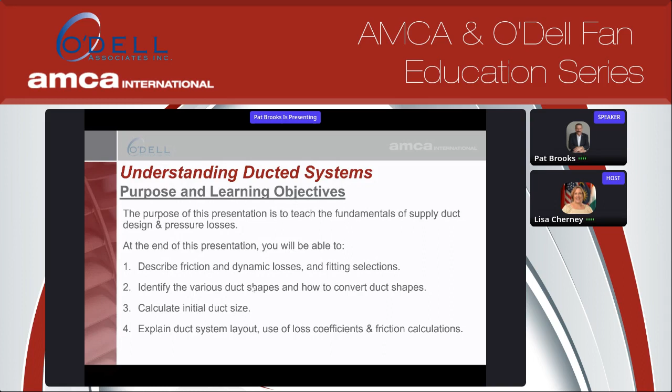The purpose of this presentation is to teach the fundamentals of supply duct design and pressure losses. So we're not going to go into great detail, but at the end of the presentation, you should be able to describe friction and dynamic losses as well as fitting selections, identify the various duct shapes, and you're probably already aware of at least two of them, calculate the initial size, and then we'll explain the system layout, use of loss coefficients and friction calculations, and talk a little bit about equal friction versus static regain and what is total pressure design. So we're going to really start out with the fundamentals.

First, a lot of this information is in this ASHRAE Duct Systems Design Guide. It's recently published. Herman Behls was the main author. Unfortunately, Herman passed away a couple of years ago, but it's quite comprehensive on duct systems. It covers supply, exhaust, and also teaches acoustics.

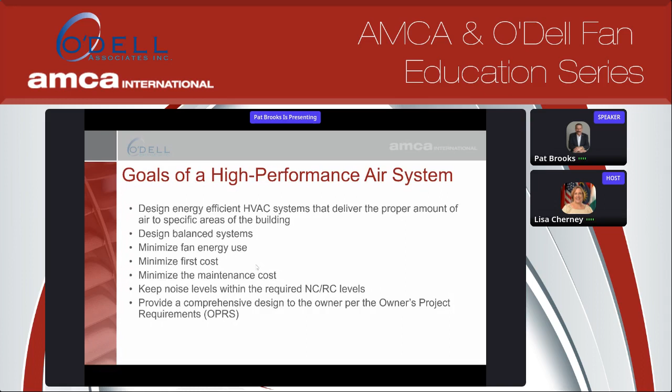All right, so we want a high performance air system. So what are the goals to get there? Well, we need to design energy efficient HVAC systems that deliver the proper amount of air. We want to design balanced systems that minimize fan energy use and minimize first cost. And we want to minimize the maintenance costs. We also want to keep noise levels within the required NC/RC levels. That's another seminar, so we'll talk about it a little bit, but not in great detail. And we want to provide a comprehensive design to the owner per the owner's project requirements. So we want the customer to be happy.

Very fundamental is cross-sectional areas. Round duct is pi d squared over 4. Rectangular is W times H. You're probably pretty familiar with those. And then the one that has become more common is flat oval. That area is equal, as shown there, to pi a squared over 4 plus a times (A minus a), where the A's are little or large according to the figure. Now what this is, you've got two half circles on either side. Put those together, that's the pi a squared over 4. And then you have this box in the middle, which is the flat span times the height. And the flat span is the big A minus the little a.

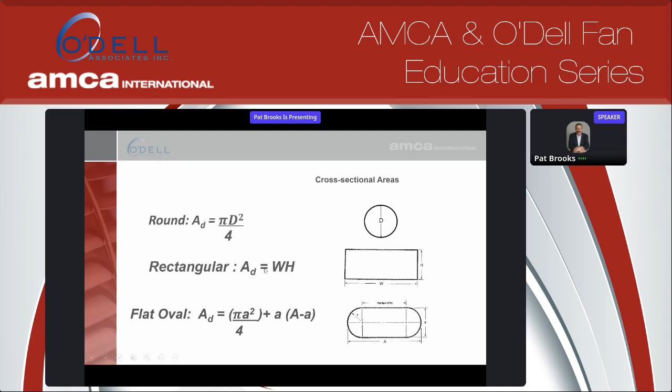Staying with basic equations, the velocity is equal to the flow rate divided by the area, or the area is equal to the flow rate divided by the velocity, or the flow rate is equal to the velocity times the area. I didn't write that last one down, but you can see how those are derived. So a quick example, and these examples are in English and SI units. I'm not going to talk too much about the SI units, but they're there.

So the question is, if the volume flow rate in a 22-inch duct is 5,000 CFM, what's the average velocity of air in the duct? So D equals 22. We're going to convert that to feet. So we get the area in square feet, and that's equal to pi times 1.83 squared, divided by 4. That gives an area of 2.64. So we take the flow rate, 5,000, divide by the area, and we get the velocity of 1,894 feet per minute. So pretty straightforward. Most of you are going to know that.

Example 2, if the design volume is 13,000 CFM and the velocity is 4,000 feet per minute, what's the H dimension of a rectangular duct if the W dimension is 14? Well, the area is equal to Q over V, so 13,000 divided by 4,000 is 3.25 square feet. We're going to multiply that times 144 to get it in square inches, so 468 square inches. And then we solve for the H in the equation A equals W times H, so H equals A over W, and that's 468 over 14, or 33.4 inches.

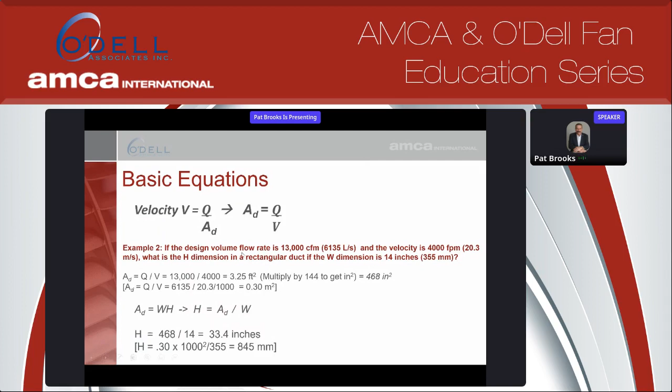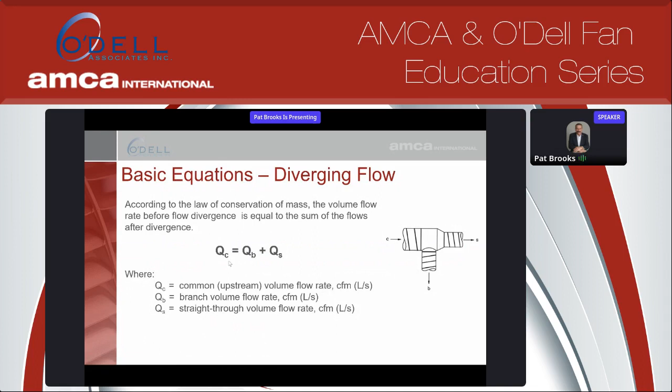Some more basic equations, a conservation of mass. This assumes air is not compressible. But the volume flow rate before flow divergence is equal to the sum of the flows after divergence, or Q_C is equal to Q_B plus Q_S.

Now, still some basic equations, but some important ones. The total pressure is defined by P sub T. It's equal to the static plus the velocity pressure at any point in a duct system. So you can see if you put a pitot-static tube in the air, what's impinging on the front is the total pressure. What's around the sides is the static pressure. And the difference between the two, as shown by the manometer, is the velocity pressure.

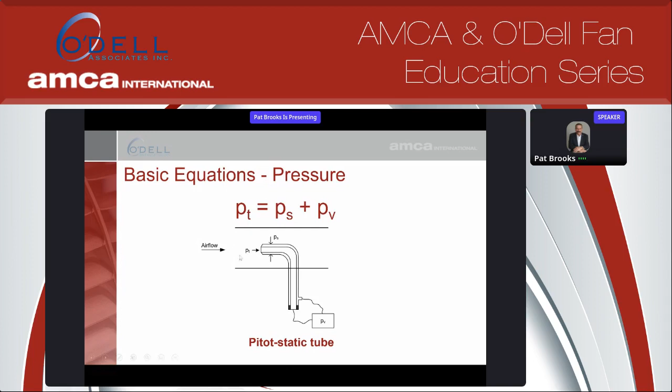Total pressure represents the total energy of the air flowing in a duct system. We like to use total pressure as much as we can in the analysis. Energy cannot be created or increased except by adding work or heat, typically at the fan. Energy, and thus total pressure, must always decrease once the air leaves the fan.

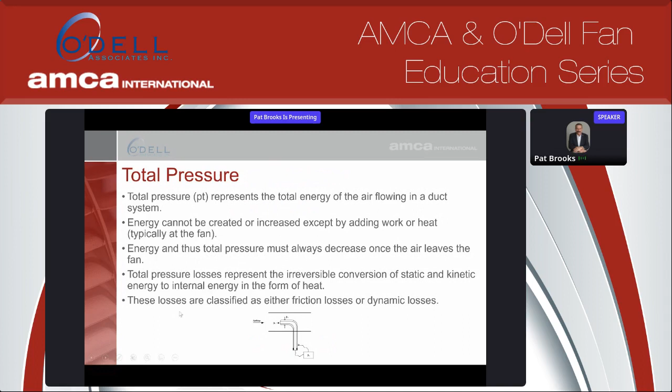Total pressure losses represent the irreversible conversion of static and kinetic energy to internal energy in the form of heat. The losses typically are classified as friction or dynamic. We'll talk more about those.

Now, static pressure is a measure of the static energy of air flowing. Air which fills a balloon is a good example of static pressure. It's equally exerted in all directions. As a bit of trivia, the static pressure at sea level is 14.696 psi. 1 psi is about 27.7 inches of water, and that means 1 atmosphere is about 407 inches of water.

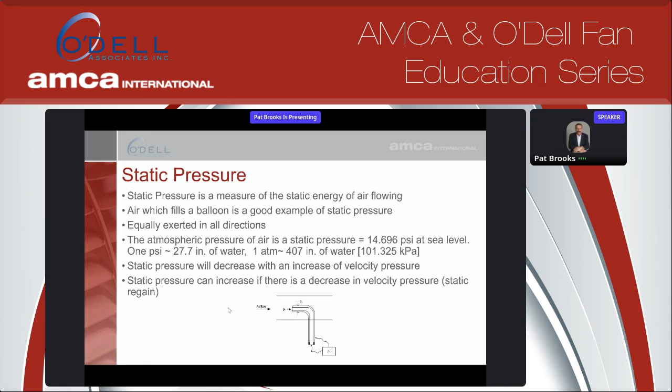It's important to understand static pressure will decrease when there's an increase of velocity pressure, so some of that static is being converted to velocity. Static pressure can increase if there is a decrease in velocity pressure, as some of that velocity pressure is converted to static.

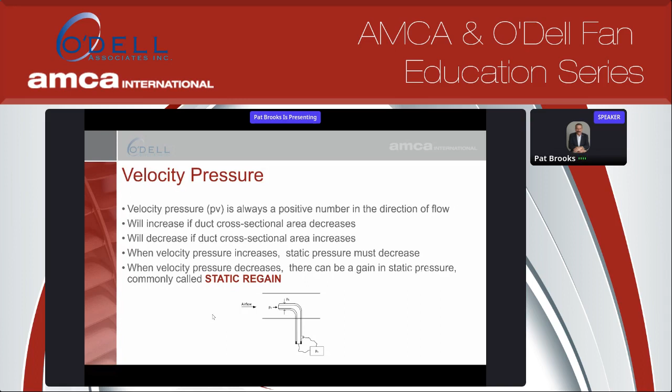The velocity pressure is always a positive number in the direction of flow. It's a vector quantity. It will increase if the cross-sectional area decreases, and it will decrease if the cross-sectional area increases. When velocity pressure increases, static pressure must decrease. But when velocity pressure decreases, there can be a gain in static pressure, commonly called static regain. But if the losses are too great, you may not get that regain.

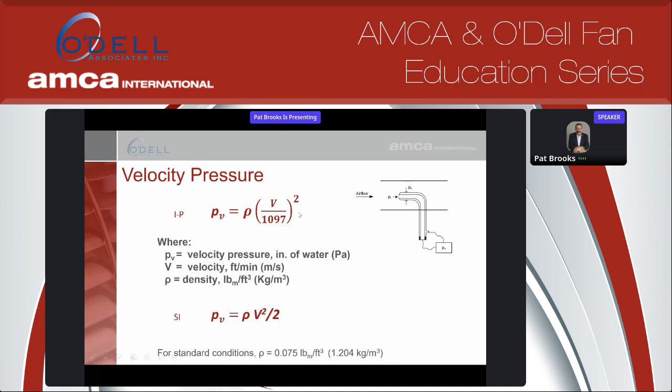The velocity pressure has a couple of equations. The main one is PV equals rho times the quantity V over 1097, squared. The PV is in inches of water, velocity is in feet per minute, and rho is the density. There's an equation for SI as well. For standard conditions, rho is 0.075, or 1.204 kilograms per cubic meter. When you do that, this top equation becomes V over 4005 squared. You want to write that down.

Let's talk about changes in pressure. I'm going from one point in a duct system to a second point, so there's a little triangle in front of P. That's the Greek letter delta, and as far as this goes, that means change. So the change in total pressure has to equal the change in static pressure plus the change in velocity pressure. That's derived from the Bernoulli equation.

Typically we ignore elevation, it doesn't have much of an effect. But if we look at this equation, we have basically the static pressure plus velocity pressure at point 1 equal to the static pressure plus velocity pressure at point 2 plus the losses. So that's how delta PT is equal to delta PS plus delta PV.

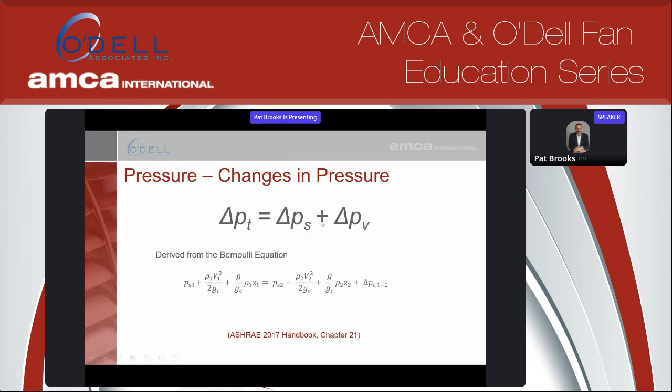Now let's look at a typical design leg. We'll talk about what that is later. But the pressure drop is a gradient along the duct system. So we start out at 0 outside, and it starts to accelerate, and we start to lose total pressure, and it always has to decrease until it gets to the fan.

Then it will increase, and then it will decrease again. So this top line is the total pressure, and note it's not 0 at the exit, not 0 till a little bit away from the exit. We'll talk about what that means.

Static pressure, however, can decrease or it can increase when you have a decrease in velocity pressure. So here's where the velocity pressure decreases on that fitting, that transition. The static pressure is actually increasing. And again, at the fan, it increases and then it decreases again.

And depending on what the velocity is doing, increase or decrease, you get to the outlet and you see at the outlet the static pressure is 0, but the total pressure isn't 0 until you come out a little bit further. That difference is the velocity pressure. So you still have some total pressure as your exit in terms of velocity pressure. The difference in these two graphs at any point in time is the velocity.

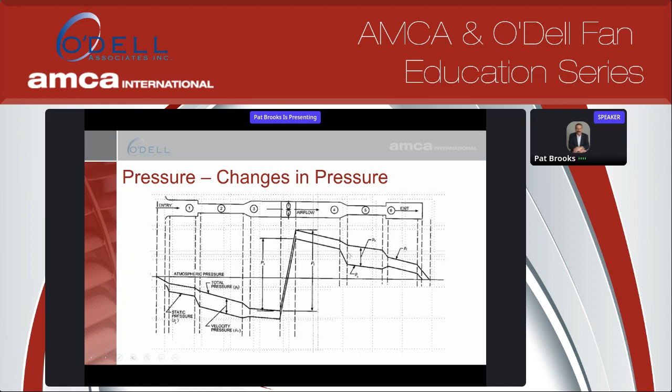So you can see it at this level, then it increases because the duct decreases. And you go through the system like that, where the duct increases, the velocity pressure decreases.

So what causes these losses? Friction losses, which are caused by air molecules interacting with each other and with the duct wall, and dynamic losses, which are mostly associated with fittings, where you might have a change in size or flow rate or construction.

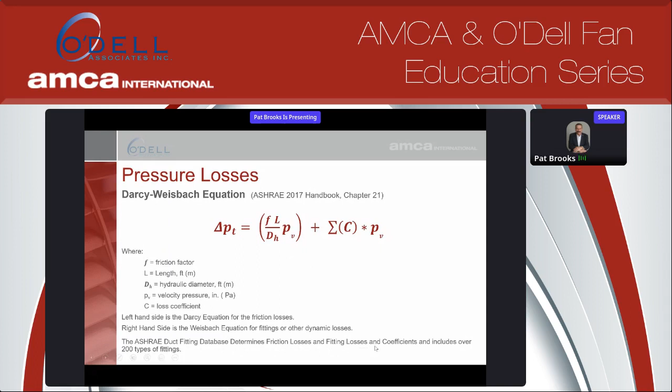The Darcy-Weisbach equation was developed to account for the losses. The left-hand side of the equation is the Darcy, and that's the friction loss. The right-hand side is the fittings, identified by a loss coefficient times the velocity pressure. These coefficients, what we're going to use is the ASHRAE duct fitting database, and it can be used to determine the friction loss and fitting losses and coefficients. It includes over 200 types of fittings.

Now, in that prior equation, one of the factors is the friction factor. So we have to determine that. And we can use the Colebrook equation.

I'm not going to read out the Colebrook equation, but you can see that it's a function of the square root of f on both sides. So it's impossible to solve mathematically. You have to solve it iteratively, plugging in an f and seeing if you get the same result on both sides. Eventually, doing that iteratively, you can determine the friction factor.

But note, it's also a function of what looks like a scribbled E. That's the Greek letter epsilon, and that is the roughness of the material. DH is the hydraulic diameter, and RE is the Reynolds number.

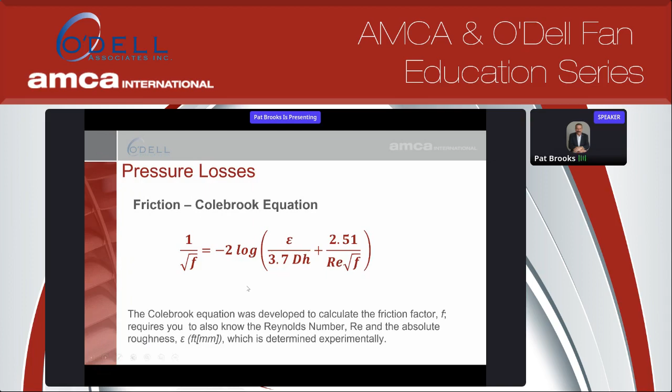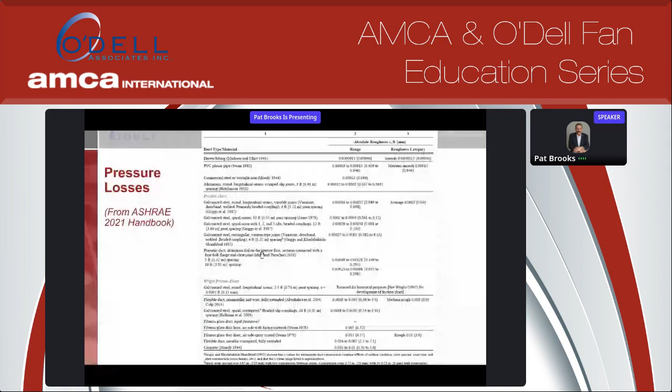Now, the roughness values are determined experimentally, and you can see in this chart, I'll blow it up a little bit, it gives you the duct material type and the absolute roughness in feet for English and millimeters for the SI system. What's commonly used is galvanized steel round longitudinal variable joints or galvanized steel spiral seams for round duct, and that's got an average loss of 0.0003. For galvanized duct, it's 0.00027 to 0.0005, commonly used 5.

Just a little clarification - this is based on 4 foot, and most rectangular systems today are 5 foot, but that's okay, you're not going to have that much difference. And I would use 0.0005.

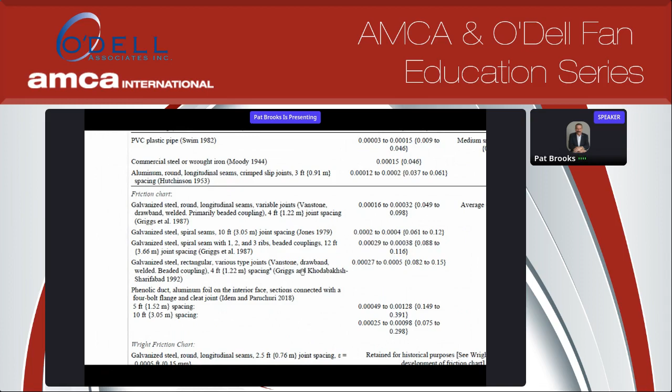The right-hand side is the Weisbach equation, as we said, and that's the sum of the loss coefficients times the section's velocity pressure. So if I have 3 or 4 fittings, I can get the coefficients for each of those in the section, multiply that times the section velocity pressure, and that's going to be the total pressure loss of the fittings for that section.

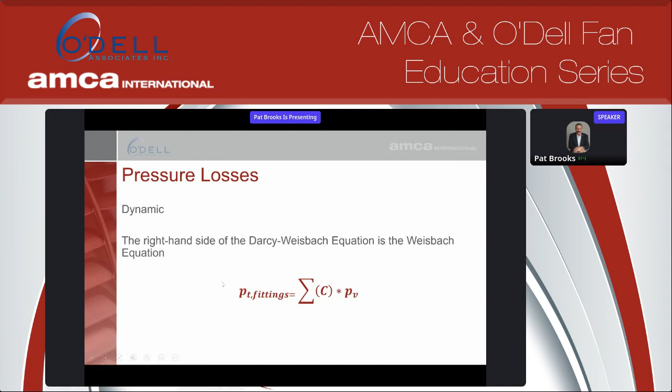Where do they come from? This is an example - they come from experimental data. This is for a single flow fitting, but the ideas work for branch fittings or diverging flow fittings as well. You measure the static pressure at plane 7, upstream of the test fitting, and again at plane 8, some diameters downstream. You subtract off the friction loss as well as the change in velocity.

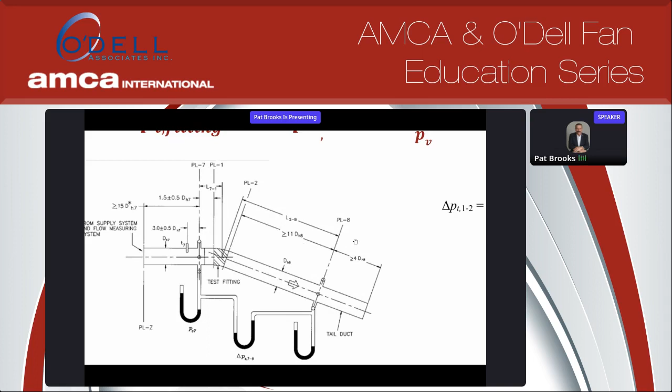Now, for a single flow fitting, the change in velocity is zero. But basically, that's the equation used to determine the total pressure loss of the fitting. That's typically called the zero length dynamic loss because it's based on no friction. The friction is always calculated to the center line of the duct.

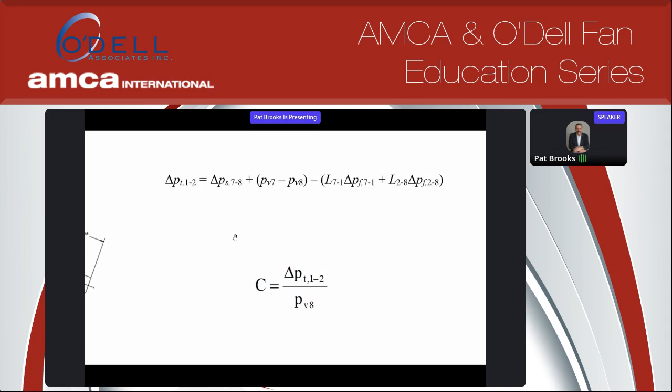Then if you get single flow values, you can actually do a regression of the total pressure loss to the velocity pressure, and that'll give you the loss coefficient. But if you're using branched fittings, then you're probably going to tabularize them based on the volume flow rates.

So I talked about the ASHRAE duct fitting database, and it's interesting - about 27% of the attendees do use the database, 63% I think were not aware of it, and 9% did not use it.

But it's a really nice program. You can actually purchase it in conjunction with the duct design guide - they'll give you a discount on it. If you do, make sure you get the spreadsheets. They're free, and they show the examples in the duct design guide as well as a master spreadsheet if you want to use spreadsheets to calculate your losses.

It calculates the loss of round, rectangular, and flat oval duct and fittings - all 3 shapes. It calculates and takes into account density, so you can change the air properties, kind of do it on the fly if you want, but it won't convert. Once you convert from IP to SI, you'll have to re-enter the values for the SI.

The typical values that you need for density are humidity, elevation, and temperature. It determines the pressure loss based on input dimensions and flow rates. You can look up a complete fitting loss coefficient table, and you can print it or export it to Excel.

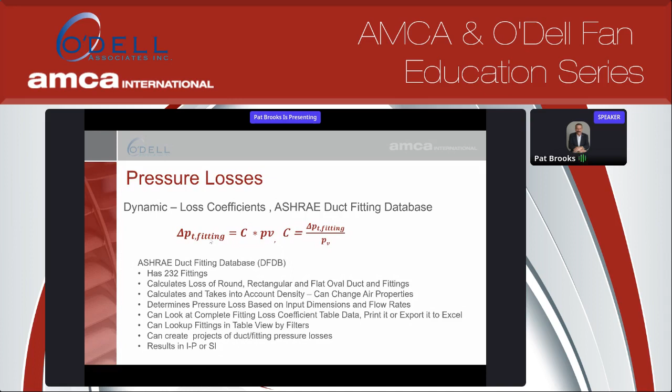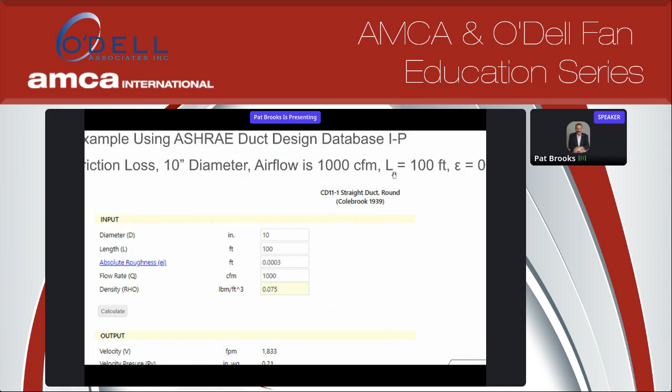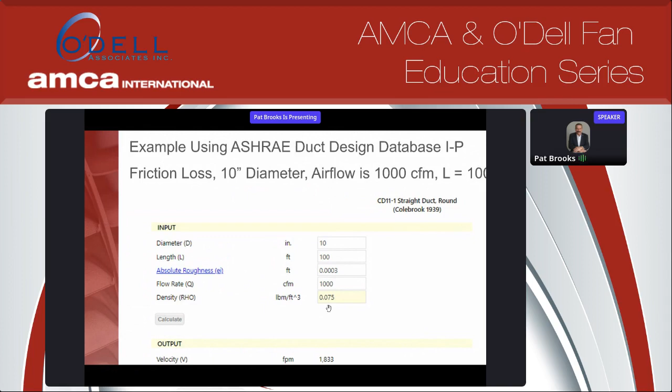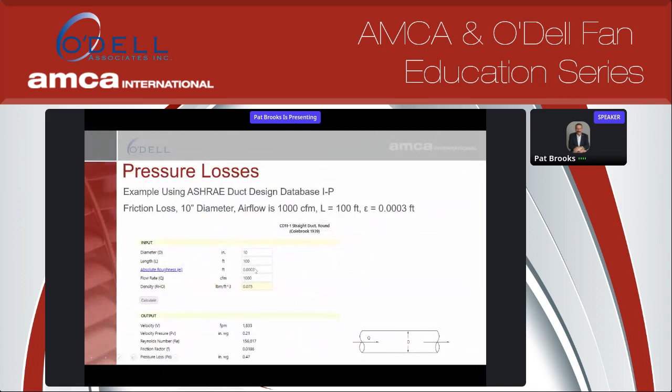Here's an example for calculating the friction loss at 1,000 cfm. Length is 100, the roughness is 0.0003. We input that data, and it calculates the density based on prior inputs, and gives the output: the velocity pressure, and most importantly, the pressure loss. You can say the same thing with the metric.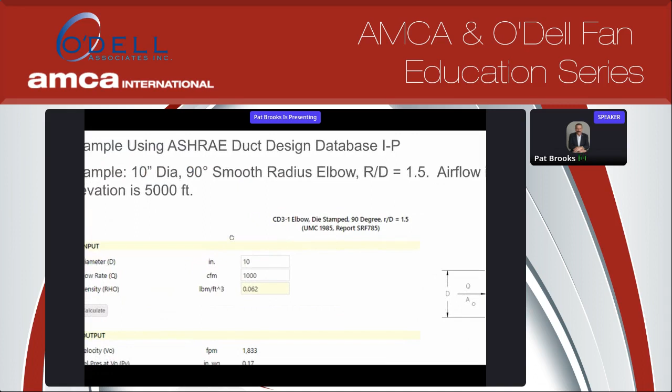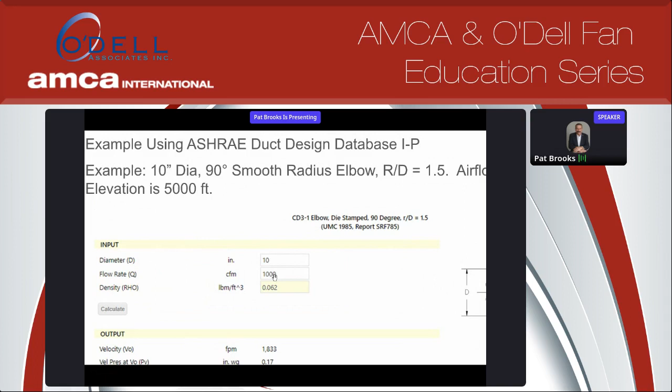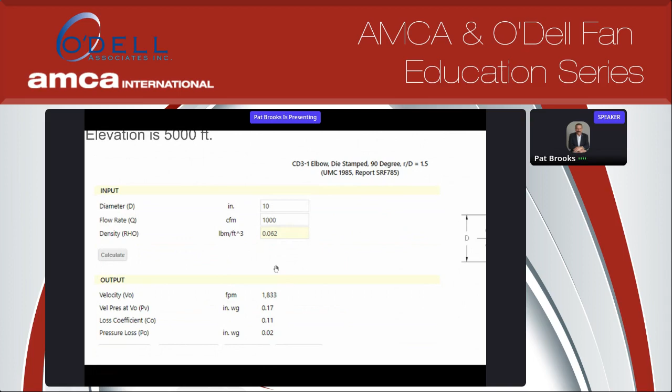Now, if I have an elbow, for example this is a CD 3-1 die stamped elbow with R over D equal 1.5. I pull that fitting up. I put in, in this case, 10 inch, but I have an elevation of 5,000 feet, so I put that in prior, and that gives me a density of 0.062. So I need the volume flow rate, and I come up with the velocity pressure, the loss coefficient, and the pressure loss. So this particular case is a very low pressure loss. And there's the metric version of that too.

Now it's important to point out what friction is a function of. So if we did a comparison with 4 different velocities from 1,000 to 4,000, and 2 different roughness values: the standard galvanized for rectangular is 0.0005, lined duct rectangular is 0.003, so that's a factor of 6 difference. An example using a 24 by 32 rectangular duct.

So if we look at the difference in the roughness, even though it's a factor of 6, there's not very much difference in the friction loss. It only increased by 0.01 at the lowest velocity of 1,000. And even at 4,000, it increases a little bit less than 0.3.

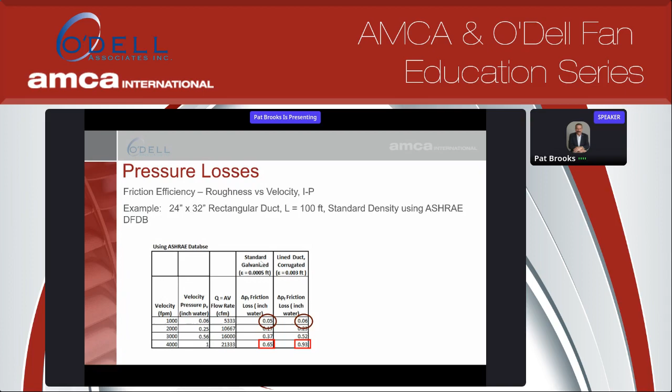But if I look at how it increases from one velocity to 4 times that: at 1,000, I'm at 0.05; at 4,000, I'm at 0.65. Same thing with metric, you can see the differences. But that's a factor of 13 increase in pressure loss when the velocity is increased by a factor of 4. So that's a pretty significant increase just due to velocity.

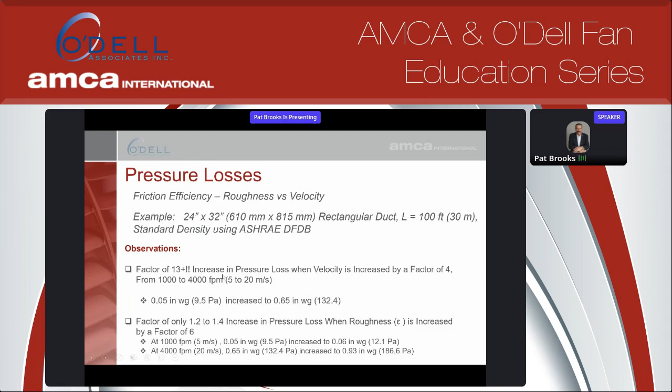But it only increases by a factor of 1.2 to 1.4 when the roughness is increased by a factor of 6. So the roughness doesn't play near as much role as the velocity does. If you can keep your velocity down, you'll keep your friction loss right down.

Here's an example of using it for rectangular. Plug in the numbers, and it's 19.9. In flat oval, here's the area of the flat oval, it's 294, the perimeter is 64. I plug those in and I get a 19-inch equivalent round size. Now, if the round size is known, then knowing one of the rectangular or flat oval dimensions, you can solve for the other one iteratively, or use the charts.

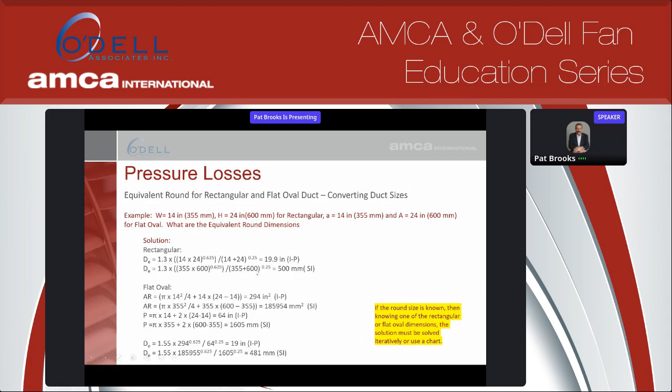I want to talk a little bit more about fitting efficiency. We'll do that with a series of elbows. The first one is a smooth radius elbow with R over D equal 1.5, that's got a loss coefficient of 0.11. For a smooth radius R over D equals 1, the loss coefficient jumps to 0.24.

But look at the lower velocities, to 2 decimal places, the loss is still only 0.01. Now if I jump up to 4,000 feet per minute, it jumps to 0.24, so that's significant. But at 1,000 feet per minute, I can probably get away with using the R over D equal 1 elbow just as well. Then there's the 5-piece, R over D equals 1.5, that's got a fairly low loss coefficient. The 3-gore, 3-piece, is 0.34.

Mitered with vanes, it jumps to 0.48. And the one we don't want you to use without vanes is a mitered elbow without vanes, that's got a loss coefficient of 1.19. But even at that, at the lower velocity pressures, the pressure drops only 0.07. Now if you go up to 4,000, it's well over an inch. That's pretty significant.

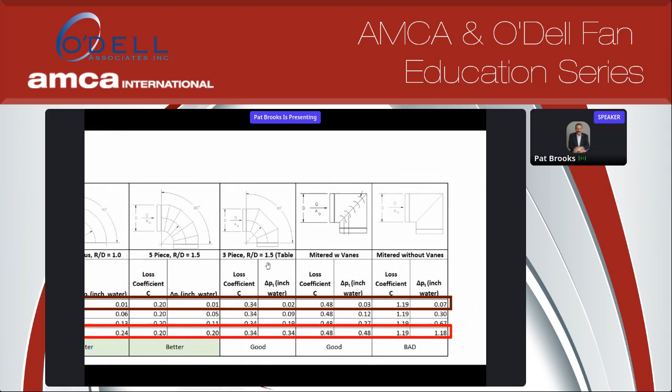Now I want to talk about rectangular elbows. You can use splitter vanes, short radius with splitter vanes. I didn't put those out here, but those can become pretty expensive. And what you might find is without the splitter vanes, the loss isn't that great. You might want to go that direction.

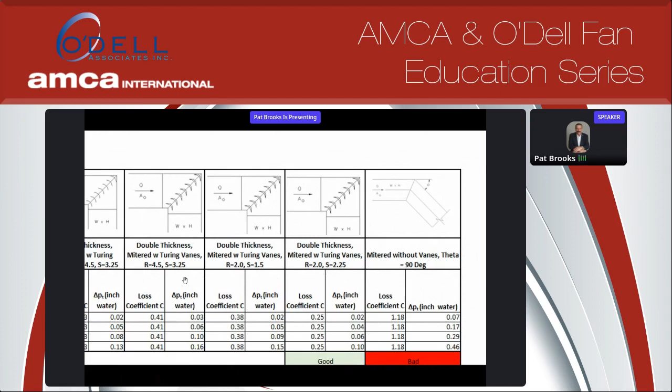This is the metric version.

A couple things we want the audience aware of: vanes with trailing edges have been tested to have higher loss coefficients than standard construction, and a lot of the reason for that is they don't get installed perfectly and they cause more turbulence than they take away. Removing every other vane can more than double the pressure loss. Don't do that. It sounds like it's money saving, but it's really not.

The other important aspect is that turning vanes are typically 90 degrees. If they're used in elbows of other angles, the pressure loss will increase. Or if they're loose, as shown in this figure 5-14, you can see the 90-degree vanes aren't turning the air all the way to 90 degrees, so this is creating a lot of turbulence here.

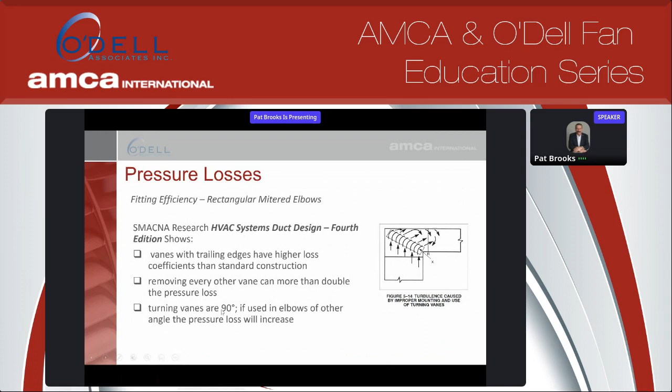What we would recommend is make the outlet of the fitting the same as the inlet and then use a transition. But if you're in a different type of elbow, let's say a 45-degree elbow, you don't want to put 90-degree turning vanes in. Either leave it out or you have to make special vanes.

Branch fittings also have associated loss coefficients, sorry about the voice.

The branch fittings also have associated loss coefficients. You can see a conical Y, 45-degree conical Y is the lowest, 0.15. 45 is still pretty low, 0.38. But a 45-degree entry is a little bit lower than the Y at 0.35. And then you have the conical of 0.44, and then a straight T, which is pretty bad, loss coefficient of 1.21. So it looks like this conical tap, this 45-degree conical, is the best.

But what's missing? Well, if you've got to turn the air 90 degrees, as you do with a 45-degree wye, you have to add an elbow. So you have additional pressure loss for the elbow plus additional cost of making it. So we recommend for 90-degree branches to use the 45-degree entry.

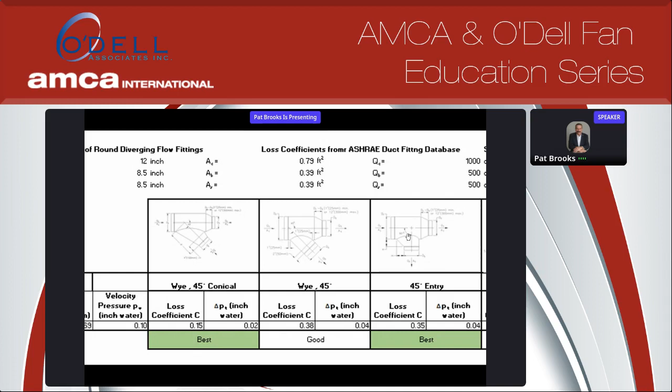Determine the design legs for both supply and return. Determine the required fan operating pressure. Analyze the duct to improve balancing, reduce material costs. Select the fan according to proper guidelines, and if you've attended the other sessions, you know how to do that. Analyze the design to make sure it meets the acoustical requirements. Select materials that minimize costs and meet SMACNA's duct construction standards. Analyze the life cycle cost of the design and commission the design to make sure it meets the owner's project requirements.

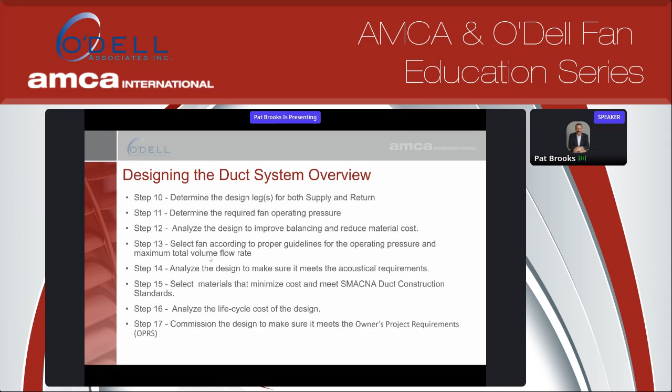So let's talk about the critical path again. The critical path is a section from the fan outlet to a terminal device with the highest total pressure drop for supply systems. Or there's one for return, from the entrance to the fan inlet with the highest total pressure drop for return or exhaust systems.

So at least let's talk about supply. One section, one path will have the highest total pressure. Other paths will have lower pressure requirements. Well, that difference is the excess pressure that the non-design leg has compared with the design leg. What happens if you don't make those equal?

Air redistributes to the path of least resistance, and you won't get the right airflows, so you have to balance the system. How do I balance it? Let's say I have a design path of 1.5 and another one at 1. How do I balance that?

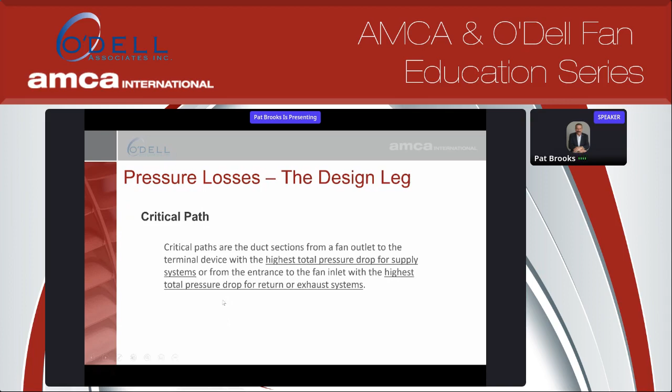I could use a balancing damper to add that 0.5 inches, or I could use a smaller duct size with a higher friction rate, or a less efficient fitting. The last two also save money, so it helps balance the system and lowers the duct system cost. That's where we use a total pressure design to help reduce the sizes.

Selecting the design method, equal friction, just some pros and cons. It's easier to use. You can use a duculator, but it doesn't account for the friction or fitting losses when doing the design, at least not the way static regain does. You still have to calculate them. And the optimum friction rate's not known. Is it 0.08? Is it 1? Is it 0.5? It's not known.

In static regain, you might have larger duct sizes, but they're offset by smaller sizes in non-critical paths. A non-critical path is the same as a non-design leg. Systems will be more balanced, often using smaller sizes or less efficient, lower cost fittings in the non-design legs. But sizing is cumbersome, may require iterations, best suited for a computerized duct design program. It can only be used on supply systems; we haven't developed the static regain method for return systems. And you must choose an initial velocity based on some guidelines.

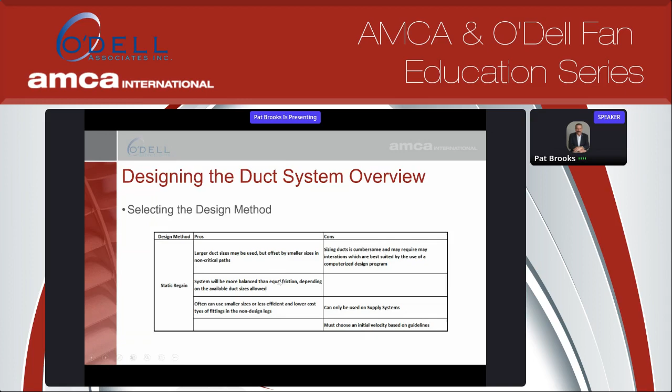So let's look at equal friction design. Size all main and branch ducts at a constant friction rate per 100 feet, including the initial section. Whatever that is, that's one way.

Calculate the total pressure loss for each section, supply and return. Use a spreadsheet if it's helpful. For each main and branch of a junction, be sure to account for the straight through and branch losses. Tabulate the total losses required for each path, then determine which one's the critical one, the one with the highest operating pressure.

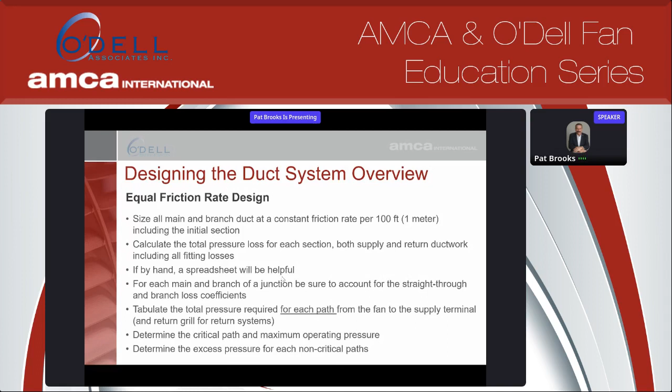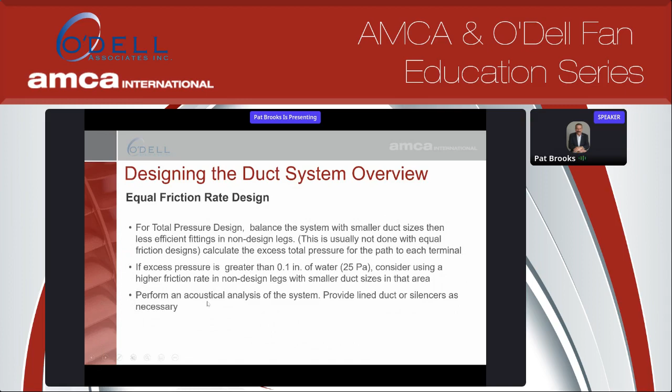Determine the excess pressure for the non-critical paths. If you applied the total pressure design to that, you can look at balancing the non-design legs by using smaller sizes, higher friction rates. Then you should perform an acoustical analysis in the system to make sure it's meeting your requirements. In static regain, you're going to determine the initial design.

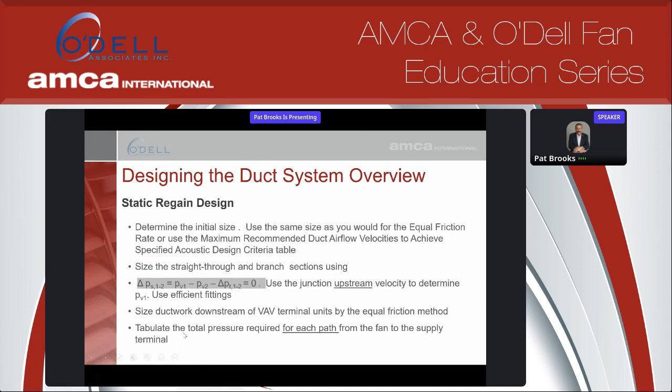Use the junction upstream velocity to determine PV1. Size ductwork downstream of a VAV by the equal friction method. Tabulate the total pressure loss required for each path from the fan to the terminal. Here's the development of the static regain equation.

Basically, what I want to do is make the static pressure at point 1 equal to the static pressure at point 2, or really the static pressure at 2 equal to 1. If you do that and go through the system, it'll be balanced, and you end up with this equation. If you solve this equation and it equals 0, then static regain will have balanced the system. Now let's take a look at that.

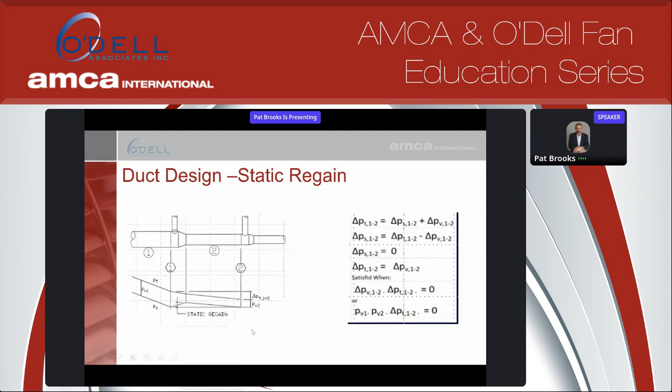It's PV1, which is going to be a given for what I'm working on in the second section, minus PV2 minus delta PT, or the total pressure loss. So the lower the total pressure loss is, the more efficient fittings I use, the higher PV2 can be, which means the sections can be smaller. That's the whole idea behind static regain: a balanced system with smaller sizes.

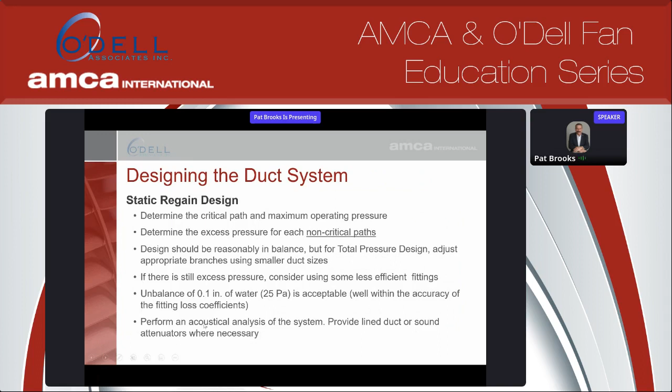For static regain design, determine the critical path, we're continuing on. Determine the excess pressure for each non-critical path. Design should be reasonably balanced, but the total pressure design method will allow even smaller sizes in non-critical paths. If there's still excess pressure, consider using less efficient fittings. If the unbalance is 0.1 inch or less, you're in pretty good shape. Perform an acoustical analysis. So we're going to do a quick example.

You can read this. The temperature is 69, elevation is roughly 5,000, so you end up with a density of 0.061. Diffuser and distribution ductwork downstream of the VAV box has a pressure loss of 0.05, and the VAV box terminal units have loss coefficients according to the following table, which allows us to add those loss coefficients into the respective sections.

ASHRAE has recommended duct airflow velocities to achieve specific acoustical requirements. The first section is typically the maximum velocity. So in this case, with duct location and shaft or drywall sealing, and wanting an NC or RC of 35, my maximum velocity should not exceed 3,500 feet per minute. That's whether you're designing equal friction or static regain. There's also a column for rectangular duct.

Sizing the first section, let's do an example. The total airflow is 11,400 CFM, and we want to size it for a maximum of 3,500. The ASHRAE database has a friction fitting that will do that for us, the CD11-3. We find the initial velocity in the round section is 3,344 feet per minute.

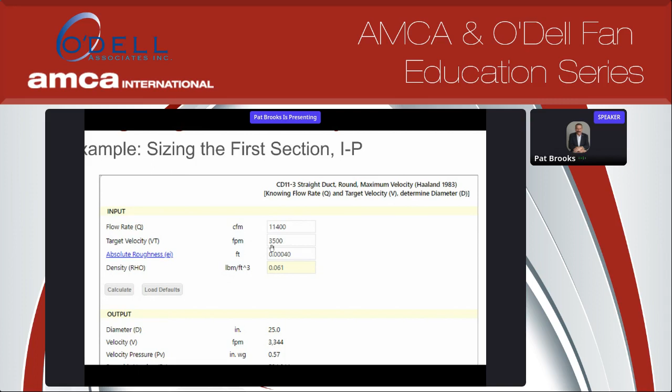Here's that section 11-3. I put in the CFM, the target velocity of 3,500, and the absolute roughness, this time 0.00040. It comes up with a diameter of 25 inches, a velocity of 3,344, gives me the velocity pressure, and the friction loss per 100 feet for doing equal friction design.

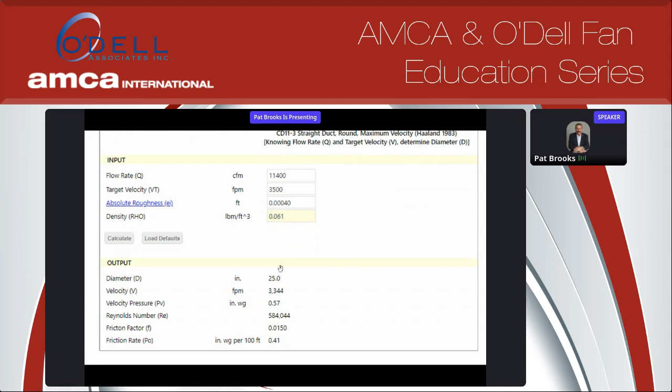You can do the same thing with the metric version.

Now let's go ahead and design the equal friction. It has a friction loss rate of 0.41. That rate is used to size other sections. I can use the duct fitting database CD11-4 to size that. It says CD11-1 to calculate the pressure losses, but CD11-4 already gives you the pressure losses, so you don't really have to use CD11-1.

We also have to account for fitting losses, so a spreadsheet is used to calculate the data. Here's the CD11-4. The target friction rate is 0.41, 7,400 CFM, and that gives me a size rounded off to 21 inches and a total pressure loss of 0.048. The actual friction loss is 0.437 inch per 100 feet.

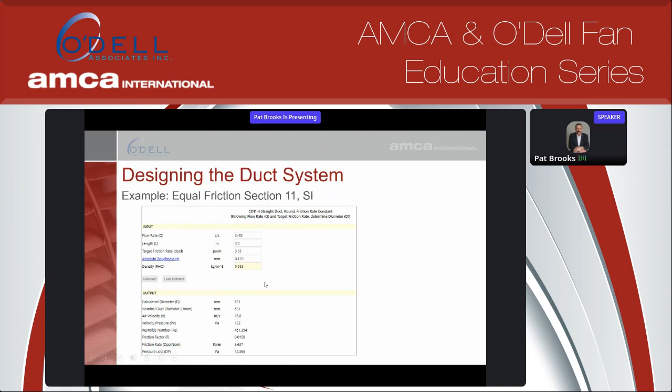The metric version. Here's the spreadsheet.

Now I'm going to look at section 2, which is off the transition of the fan. We already said it's 25. I've got a couple of different types of fittings, an elbow and a branch fitting. I put down their loss coefficients because I can add those up to a total of 0.14. Multiply that times the velocity pressure in the section, and I get 0.08. The friction loss I've already calculated at 0.11. Adding those together gives a loss for section 2 of 0.19.

Going on to section 11 with the 7,400 CFM, the duct size becomes 21 and velocity 3,077. I still have a loss coefficient of 0.14 for the T. Multiply that times the velocity pressure, it's 0.07. Add that to the friction loss, and it's 0.12. I just continue to do that. This is the metric version of it.

So the results are total pressure drops for each of the paths, the excess pressure, which is the highest pressure drop minus the pressure drop required, and a deviation, which is an average percent away. So what's the design like here? Well, the highest pressure drop is 1.3, so it's the path to box 9 and 10.

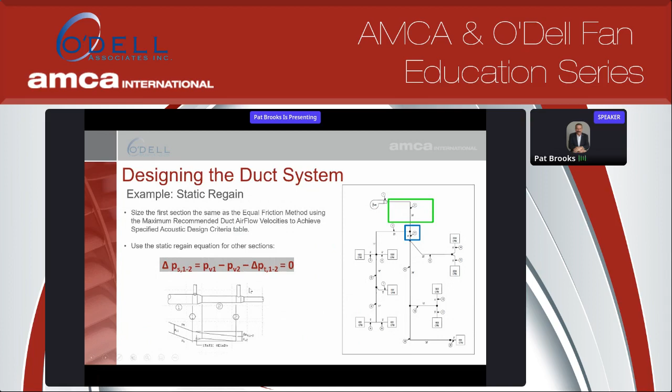Now for the static regain, I'm going to use this equation. Again, the first section is designed the same way with acoustics. But when I'm doing the calculations, you can see here, this is section 2, has the same result as the equal friction because that's the first section. But I added a column, the regain column, which is PV1 minus PV2 minus delta PT. When that's equal to 0, then I've got the correct size.

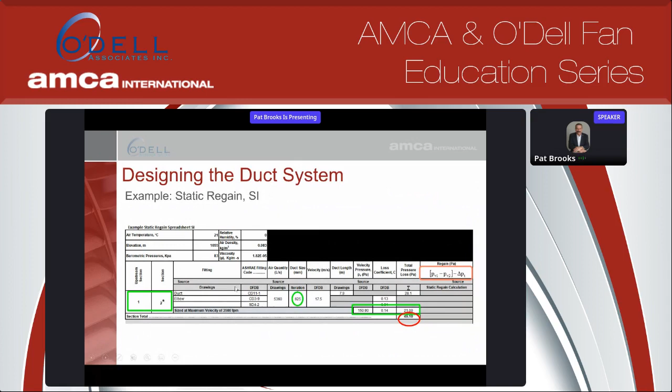There's the metric version for the first section. So this is where the iterations come in. The size upstream is 25, and I start out with that. My pressure drop is too high—it's not shown here, but I have to go to the fourth iteration. So I went from 25 to 24 to 23 to 22-inch diameter. At 22-inch diameter, the regain is 0.07. If I go one more, the regain becomes negative. I don't like negative, so I go back to the 0.07, and the size becomes 22 inches.

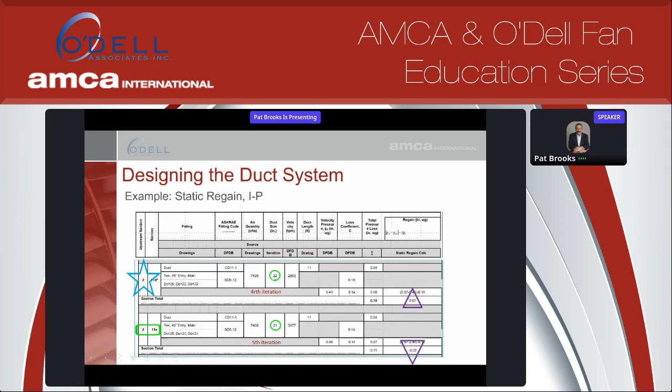Same thing with the metric.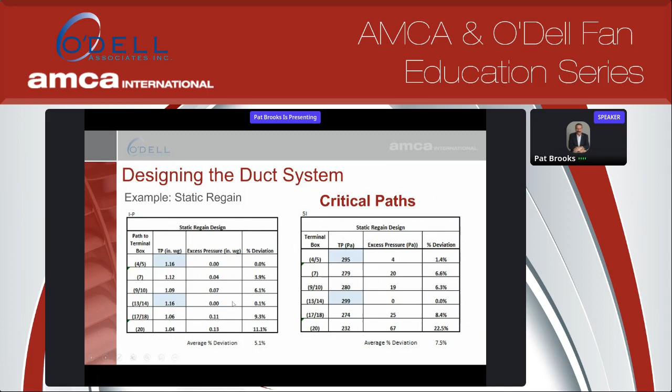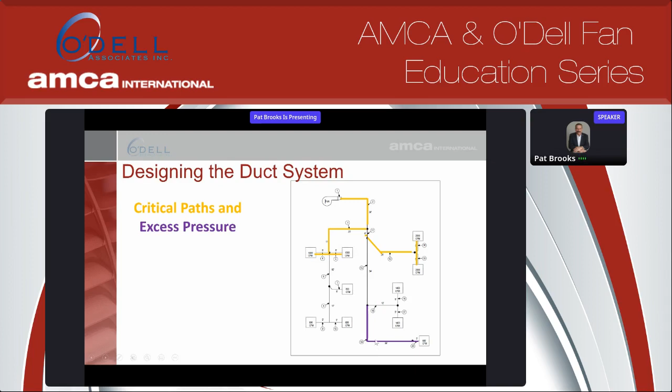So here's my critical paths going into sections 4, 5, and 14. This shows there's excess pressure in section 19. So we'll take a look at that.

So this is comparing the static regain to the equal friction. You can see the equal friction has a higher pressure requirement, and it actually is a little bit worse balanced, but it's pretty close. That's due to the lower velocities in the symmetrical. But the general case is the static regain will give you a better balance.

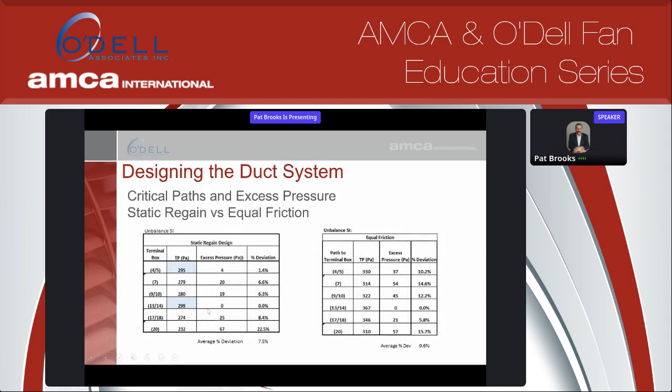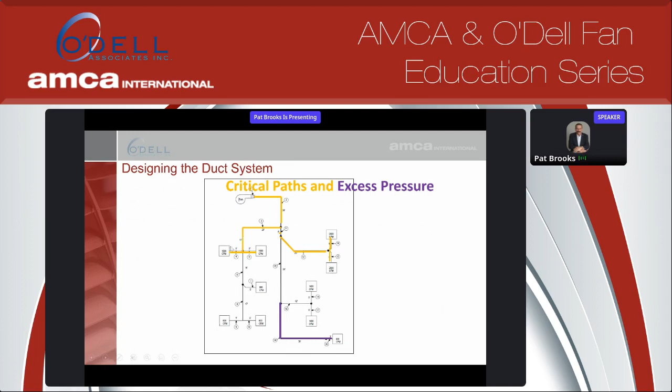So that's the metric version of it. If I want to apply the total pressure method with the static regain, I'll go to that section 19. It's now 9. What if I lowered that to a size of 8, or 229 to 203 millimeters? What happens? Well, that makes this leg very close to the other two legs. We'll take a look at that.

Static regain versus the total pressure. Now, the operating pressure didn't change, still 1.16, but the excess pressure went from an average of 5.1 down to an average of 3.8. And in particular, section 19 was reduced by an inch. So that in itself is saving money.

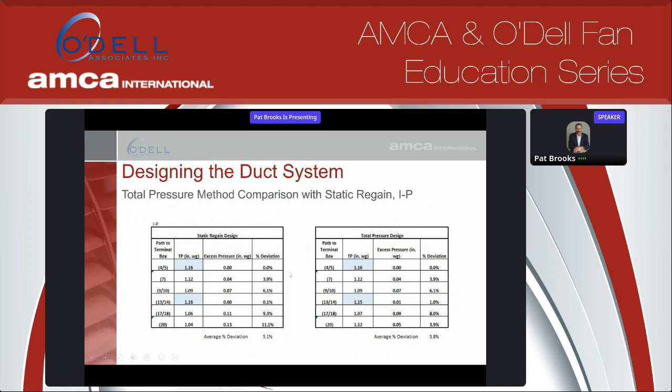And there's the metric version of it. So in conclusion, equal friction designs may not be well balanced. Now, it could be if you're using very low velocities and it's fairly symmetrical. It could be pretty well balanced straight out of the gate.

Static regain design should be better balanced, and for the same first section should have a lower operating cost. First sections can be sized to meet acoustical objectives. Efficient fitting should be used in the initial design. We saw that with the static regain, that the more efficient the fittings, the higher the velocity pressure can be, which means smaller duct. Smaller duct sizes or less efficient fittings can be used after the initial design to help balance.

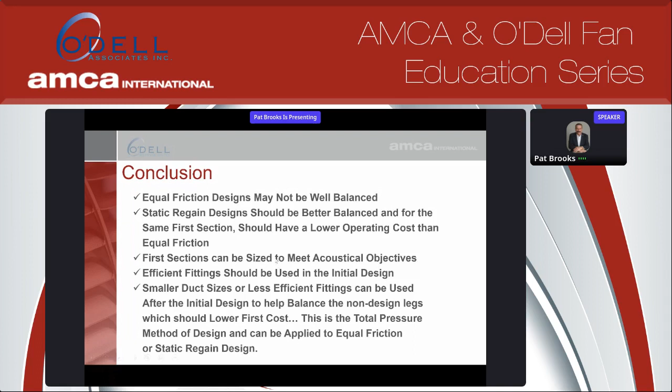And that's the total pressure method can be applied to equal friction. Usually not, but it certainly can be applied to static regain design.

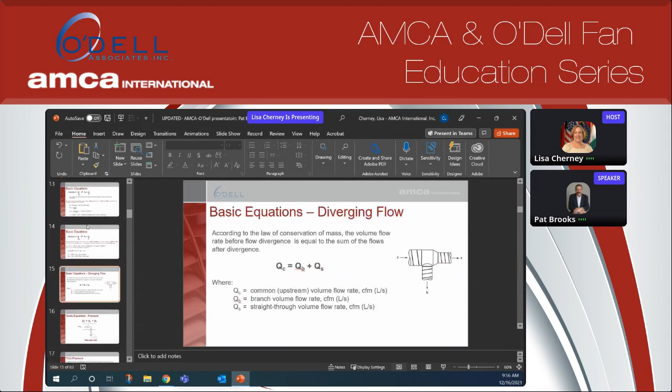Yeah, that's my understanding is the static pressure at the fan outlet is what that is. And if you have a static pressure inlet and that difference, that could be how the fan is rated. So yes, I'll say yes.

Okay. And then we have another question that came in, and this gentleman is asking, how does using static regain save on operating cost versus adding balancing dampers? Okay, well that's two different things. You want the system to be balanced.

Static regain helps with the balancing, especially if you use the total pressure method. It inherently depends on the comparison—you can design any system to any static pressure. But if you use a comparison where you make the first section the same as you do equal friction,

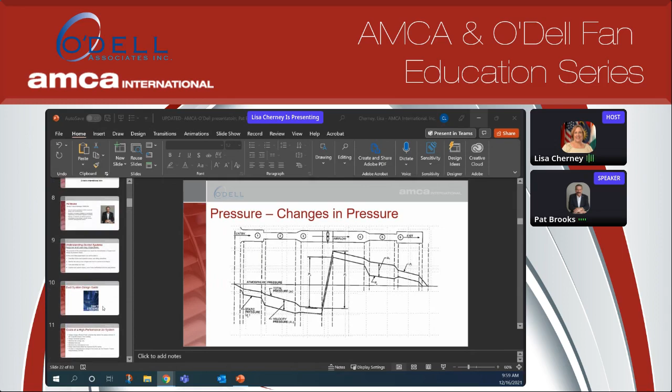At the beginning, with the poll question, we asked about the duct systems design guide and whether people were using it, not using it, or aware of it. So it's probably good to mention the duct systems design guide again—could you remind people how they can get a copy? Actually, the poll question was on the duct fitting database, I'm sorry, you're correct, but that's okay. To get either one, you have to contact ASHRAE headquarters. I know they had a sale on the Duct Systems Design Guide when it first came out—it was around 120. I think there's a combo where you can get the Duct System Design Guide and the duct fitting database for a discount. But fair warning, the duct fitting database is licensed yearly, so you have to renew the license each year. But I think you get it free, so I'm not sure. That's good to know, thank you.

Another question: what is the most common roughness factor when determining friction loss? That's a good question. 0.0003 feet is what's used to create the friction loss charts. But depending on what you're doing, if it's rectangular, it should be 0.0005, and if you're doing spiral with 10-foot lengths, it should be 0.0004. As you saw, the roughness doesn't make a huge difference, so I would use probably an average of 0.0004.